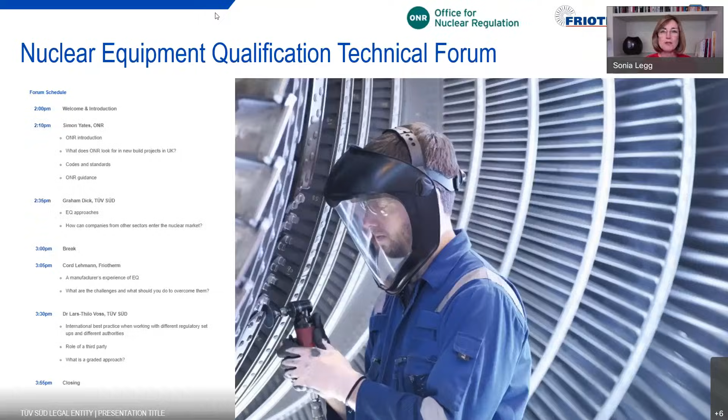So without further ado, let's move on to our first guest. He is Simon Yates from the Office for Nuclear Regulation. He is a principal inspector at the ONR and is an expert in nuclear safety. In fact, he's been working in nuclear safety for more than 30 years. So Simon, thank you for being here today.

I have a question for you. If I was a manufacturer, like many of our guests here today, what do I need to know if I want to supply the nuclear sector? Yes, the nuclear industry is quite rightly heavily regulated to protect the public in the unlikely event of a nuclear accident. Some of the qualification requirements may seem daunting at first, but when you listen to the presentations this afternoon, remember that you won't be alone, as there's a lot of support and guidance available.

I'm going to start off with a brief introduction to ONR for those of you who may not be familiar with the UK nuclear regulator, and then I'll go on to talk about the regulator's perspective on equipment qualification.

ONR is an independent statutory body which was established in 2014 on the commencement of the Energy Act. Formerly, we were an agency of the Health and Safety Executive, known as the Nuclear Installations Inspectorate. ONR is as far removed from the government as possible, and the government plays no role in regulatory decision making.

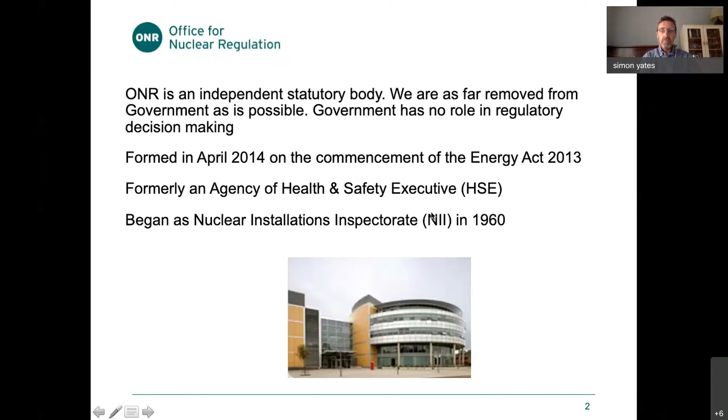There are two parliamentary acts that enable ONR to perform its duties in regulating the nuclear industry. First is the Health and Safety at Work Act 1974, which covers conventional health and safety, nuclear safety, and introduces the important concept of so far as is reasonably practicable when talking about controlling risks. The Energy Act created ONR and defines its purposes in terms of nuclear safety, nuclear security, conventional health and safety on nuclear sites, nuclear safeguards, and the transport of radioactive material. ONR inspectors are warranted under both of these acts, which provide a wide range of enforcement powers.

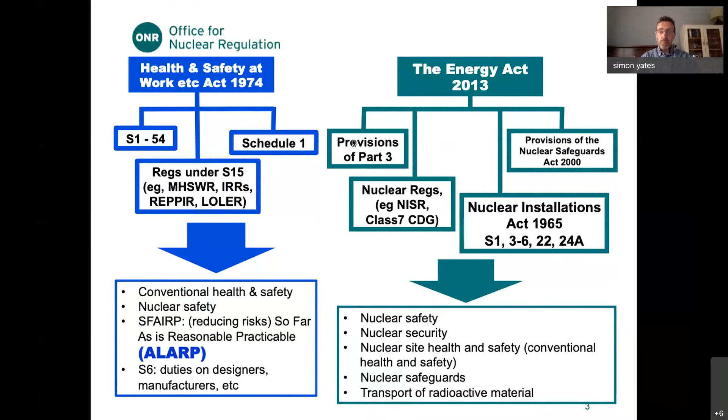The UK operates a goal-setting regime rather than the more prescriptive standards-based approach which is used in some other countries. ONR sets out the broad regulatory requirements, and then the licensees must determine how best to achieve these requirements. This allows duty holders to achieve the required high levels of nuclear safety by adopting the practices that are most suited to their particular circumstances.

This approach also encourages continuous improvement and the adoption of relevant good practices. ONR inspectors generally don't use their regulatory powers in the first instance. Rather, we like to work with the licensees in terms of persuading and influencing and developing open and effective dialogues. Again, just to reinforce that the so far as reasonably practical, or ALARP, approach is central to UK health and safety law.

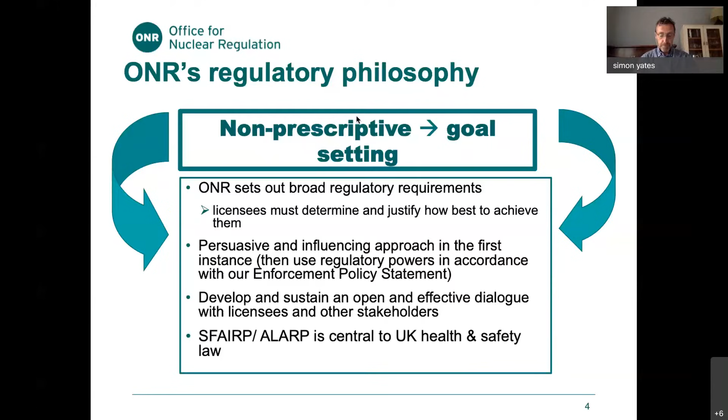So what is equipment qualification? The IAEA documentation includes the following requirement, which defines qualification as the verification of items important to safety, that they're capable of performing their intended functions when necessary in the prevailing environmental conditions throughout their design lives. This definition is reflected in ONR's assessment principles.

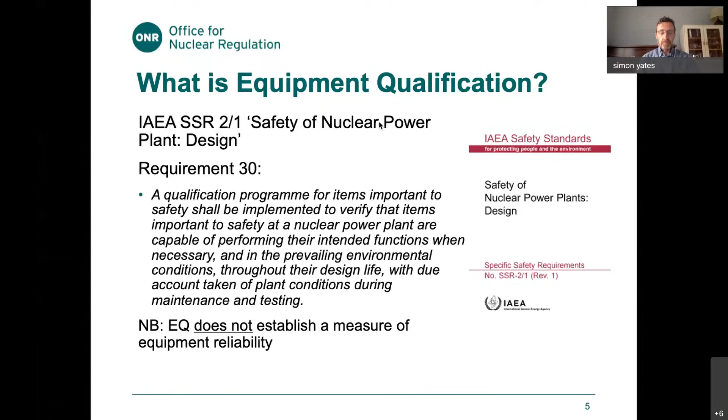The qualification requirements that the supply chain needs to deliver are derived in the facility safety cases by the licensee or the duty holder.

The inputs for equipment qualification are defined in terms of the safety functions for the individual items of equipment, which are generally defined in terms of the required behaviour and the duration or mission time for that piece of equipment. And then the service conditions under which specific equipment is required to perform those safety functions. These are generally established in terms of normal operation and accidents, otherwise referred to as postulated initiating events.

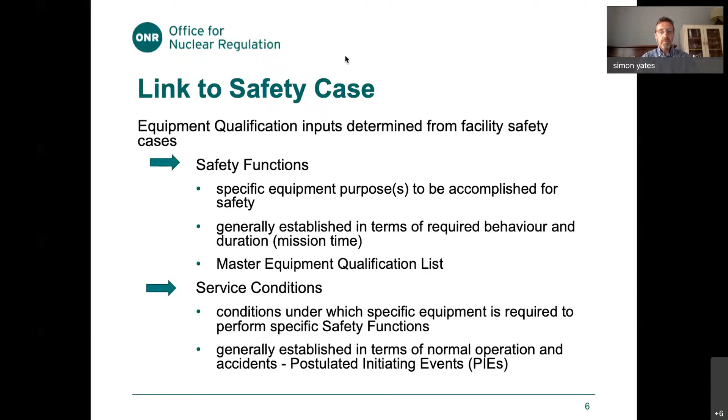Looking a bit more closely at safety functions, they can be broken down into three main types: integrity, stability, and operability. Integrity and stability are generally demonstrated by complying with the applicable codes and standards when designing, constructing, and inspecting. This would be the approach adopted for piping, vessels, and other structures.

In terms of operability, which is applicable to electrical equipment, I&C, and mechanical equipment, this is generally demonstrated by performing qualification testing.

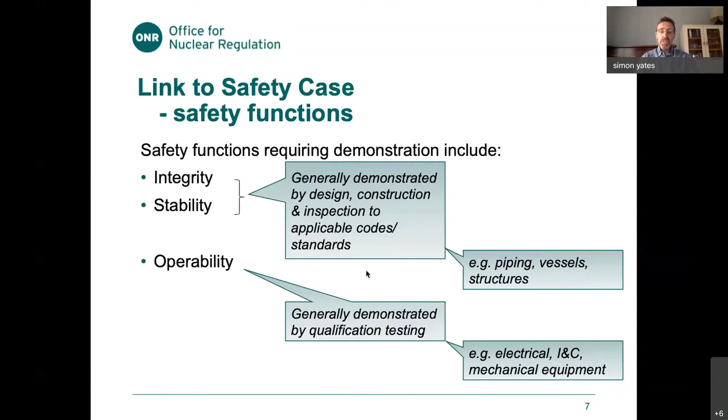In terms of service conditions, we have a range of postulated conditions that are categorised as normal operation, abnormal conditions or mild conditions, and accident conditions, otherwise referred to as harsh conditions. The first two are generally considered as part of the normal design assurance process, but special attention needs to be paid to the accident conditions or harsh conditions, which typically arise during loss of coolant accidents, high energy line breaks.

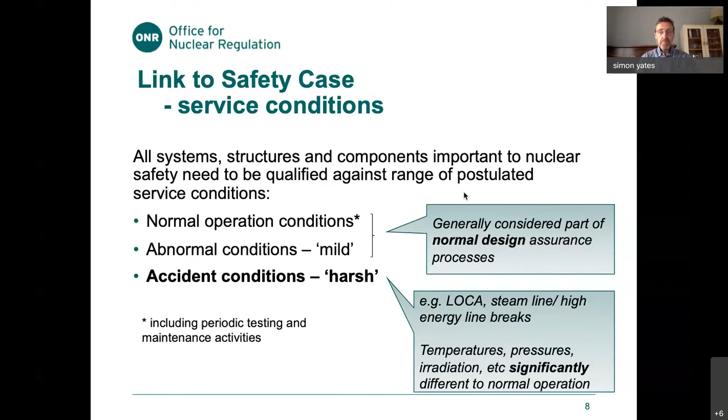During such events, temperatures, pressures, and irradiation tend to be significantly different from those which occur during normal operation. So for harsh service conditions, little confidence can be derived from normal factory tests, commissioning, normal operation, and in-service testing, hence the need for specific qualification testing during the procurement and manufacturing activities.

Harsh conditions tend to focus on those events with the potential to produce multiple simultaneous common cause failures. As mentioned, this typically includes LOCAs and steam line breaks. Seismic vibration is typically included within equipment qualification programs, as this hazard can also lead to common cause failure across a facility. Other hazards, for example flooding, are generally addressed by physical protection and separation.

Qualification for harsh service conditions is also commonly referred to as equipment qualification for accident conditions.

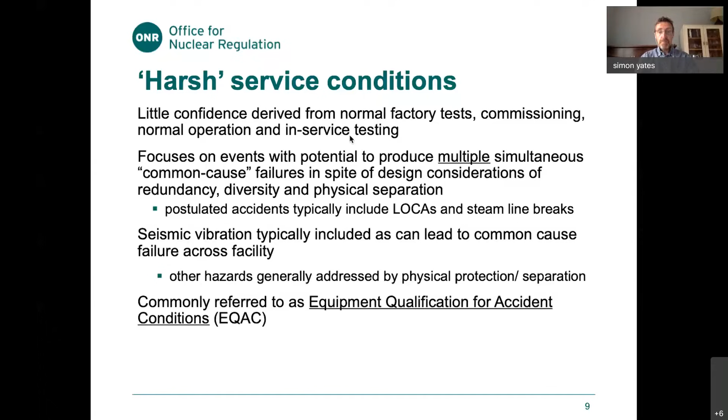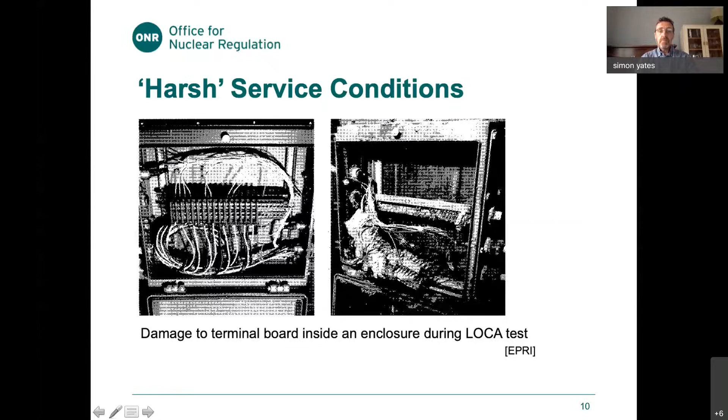An important aspect of equipment qualification is the ageing, in order to adequately reflect the degradation that can occur during normal operation prior to accident conditions. So any qualification must address the ageing occurring from elevated temperatures and radiation levels, and this is of particular relevance to non-metallic components.

The ageing evaluation also feeds into defining the qualified or installed life of particular equipment, after which the equipment may need to be replaced or refurbished if it has not been demonstrated to withstand the ageing for the full operational period of the particular facility.

Through life environmental monitoring also allows the opportunity to confirm the bounding nature of the qualification, and also in some circumstances to extend the qualified life of particular equipment.

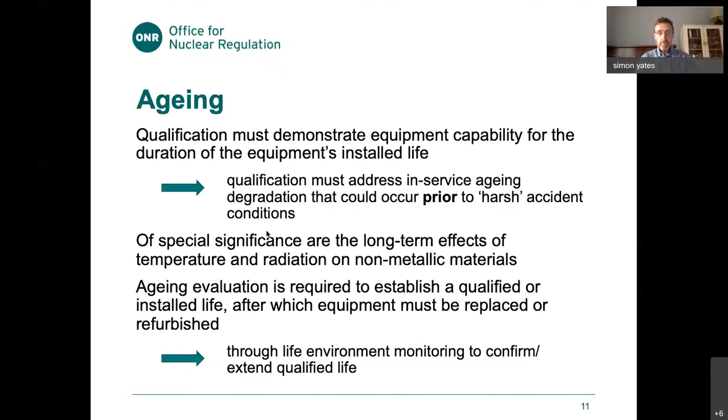Mechanical equipment is generally less sensitive to ageing mechanisms and the harsh environmental service conditions or the ambient service conditions, with the exception of non-metallic components, for example plastic, rubber components, lubricants, paints and coatings, and also seismic events. For mechanical equipment, it is often the operational service conditions during accidents that can be more challenging.

By operational service conditions, I mean the system conditions, for example, valves needing to operate under two-phase flow and pumps needing to handle debris following accidents.

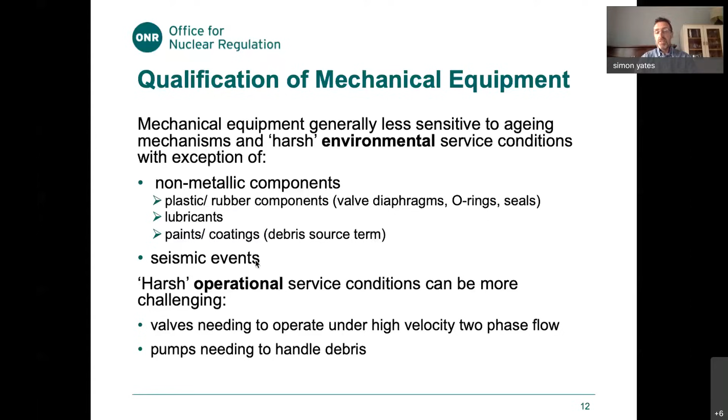This is just a photo of a valve solenoid diaphragm which has been damaged during a LOCA test.

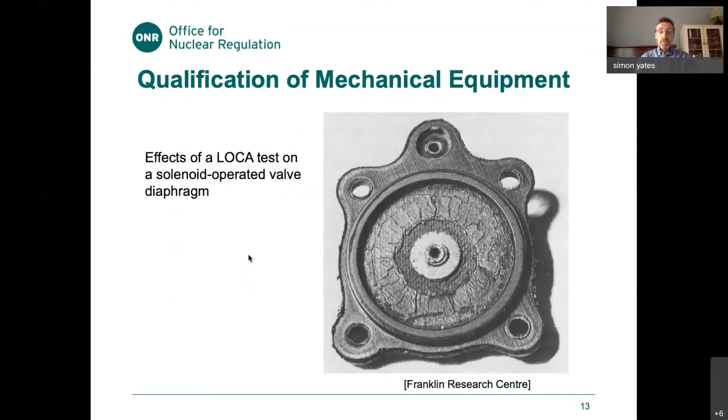The IAEA defined 3 key phases of an equipment qualification programme: the design inputs, establishing EQ, and then preserving EQ. The supply chain has an important part to play in the establishing qualification phase, as this is when any qualification testing is undertaken and the qualification documentation prepared to support the licensee safety case, and then for the ongoing preservation activities.

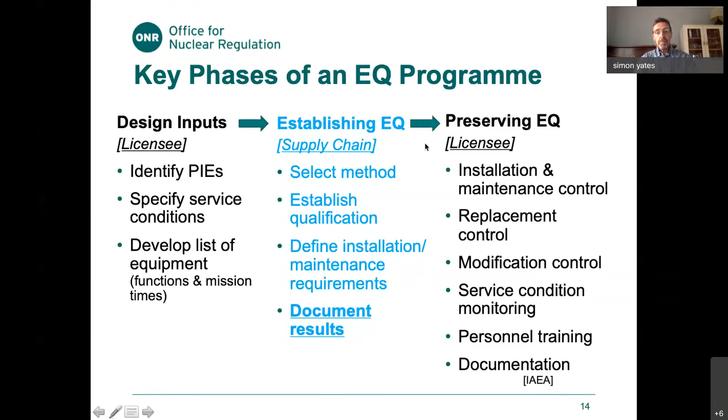It is up to the licensee to demonstrate that their approach is adequate and able to satisfy the requirements of their safety case, whilst meeting the so far as reasonably practicable principle.

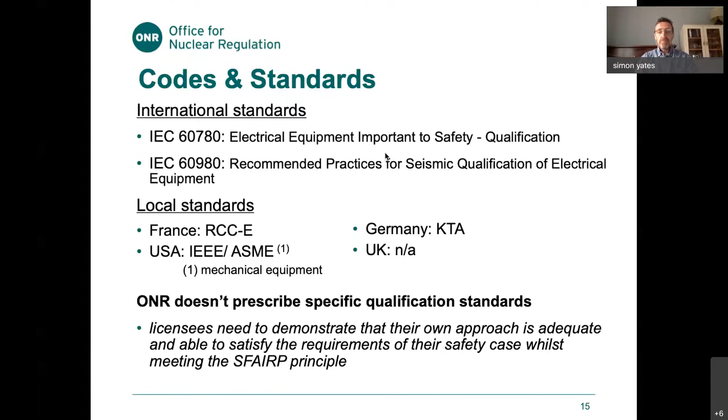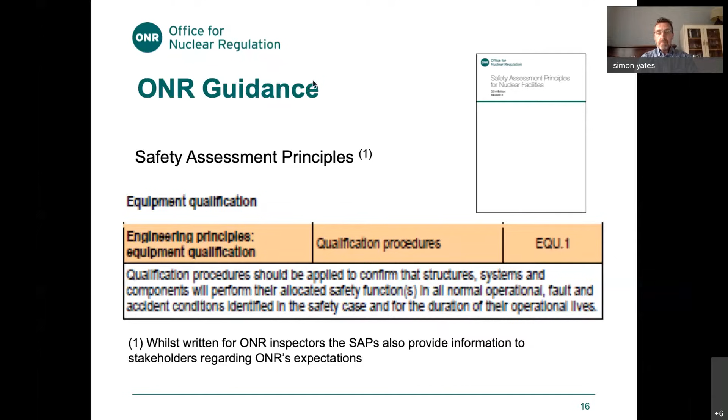In terms of ONR guidance, the ONR safety assessment principles, which are written for ONR inspectors but are also available to stakeholders, include a principle for equipment qualification, EQU.1, which effectively reflects what's in the IAEA guidance document I presented earlier. Currently, this guidance is very limited and only covers concepts at a high level, and doesn't particularly draw out the significance of qualification for harsh service conditions.

There's no single source of guidance on developing and implementing an equipment qualification programme. So it's been recognised that there is a need for an ONR technical assessment guide on equipment qualification, focusing on harsh environmental conditions. This is largely driven by the needs of the civil new build programme, but will also apply to existing nuclear facilities with a proportionate application. A draft of the technical assessment guide is currently being produced and will be shared with the Nuclear Industry Safety Directors Forum in due course.

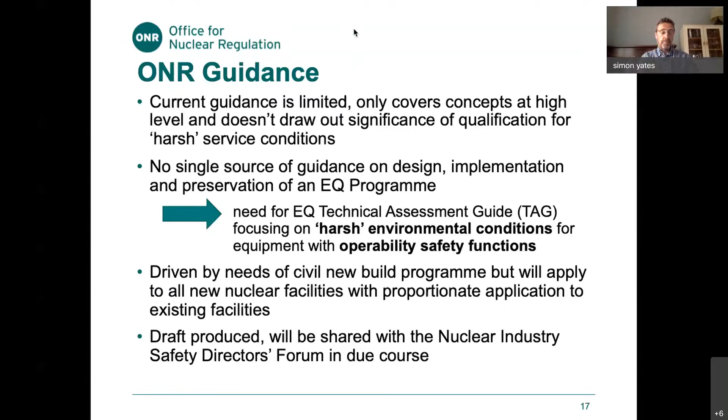So to summarise, three key things to remember: equipment qualification inputs are determined from the facility safety case; equipment qualification provides confidence that equipment can perform its intended safety function during normal operations and accident conditions; and finally, equipment qualification must be preserved throughout the lifetime of the facility and contributes to reducing risks so far as reasonably practicable. Thank you.

Thank you, Simon, for a very comprehensive overview there. I think that gives you a real insight into how important EQ is. And in fact, Simon, we've got a couple of questions for you. I know people are just warming up on the questions front, but do get them coming in. We do value them. But I've got a couple here for you, if that's all right, Simon. Just wondering if the UK has tougher regulatory requirements than other countries. Obviously you represent them, but where do they sit in that?

As I mentioned in the presentation, the ONR doesn't actually specify a particular approach, and in general the principles and methodologies adopted in the various standards are very similar. UK licensees are likely to adopt the standards from the equipment vendor's country. Where the UK approach to regulation may alter the requirements for equipment qualification is through the extent of the equipment to be qualified, the detailed safety functions to be qualified, and the service conditions in terms of pressures, temperatures and radiation, which may all be different from other countries due to the requirements the ONR places on the licensee in terms of their safety case.

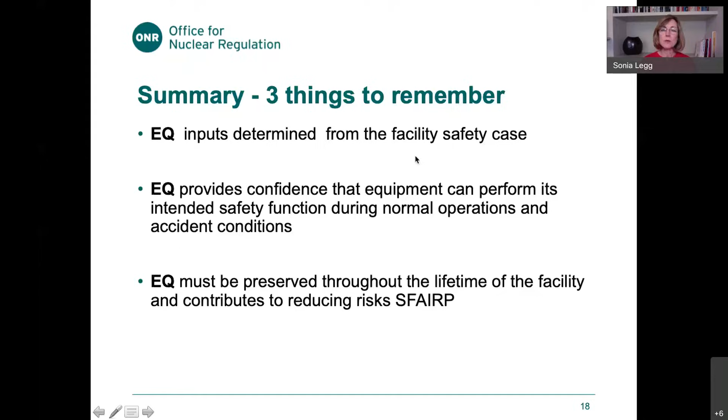And hopefully I can talk you through some examples.

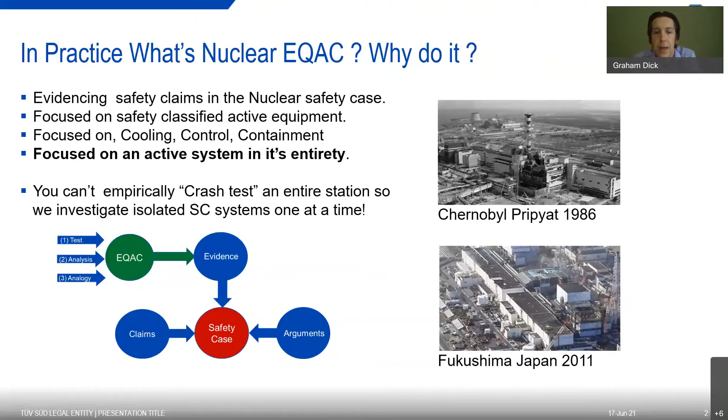We've got a quick graphic on the screen that illustrates how the evidence generated by the EQAC activity feeds into the safety case, so it satisfies the claims made in the safety case.

I'll briefly speak about the three main philosophies used in qualification within EQ. As a supplier who needs to qualify your equipment, what would you need to consider? Which approaches would suit you, and which would you choose?

The one that everybody thinks of first is test. We use a test-based approach where you really can't use analysis, either because the environment can't readily be simulated or because the technology is just not readily understood, or it's just too hard to model.

We often find that suppliers may already have FAT data, and they often ask specific questions as to whether they need to go ahead with a dedicated EQ test. But as we briefly mentioned, FAT data doesn't often adequately simulate nuclear accident conditions, so as such it won't satisfy the claims required in the qualification file.

We have a few pictures on the screen illustrating what we can do. In short, TUV are the largest laboratory group in Europe, and we have most of the capability we need under our roof. I won't go into exact details of what we have, but most qualifications can be completed without specimens leaving our group, and often without them leaving a specific laboratory.

To give an international perspective, our key facilities are in Munich, Fareham, and Scotland - there are pictures on the screen of the Fareham facility. The key point here is that the NEL laboratory in Scotland is the national laboratory for UK flow measurement standards, with other national standards being held at NPL at Teddington.

So we're well placed to qualify against design basis failures, and of course, seismic.

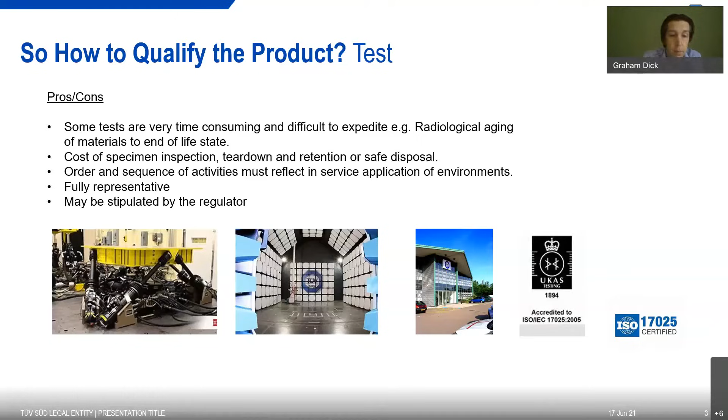That really brings me on to the second most commonly used approach. We've talked about test - the second most commonly used approach is often analysis, and analysis is often regarded as the most flexible approach.

We're pretty much at the cutting edge of product analysis and modelling, not only in nuclear but also in other sectors, with an accomplished in-house team of analysts and programmers.

Crucially, I think these capabilities can be used across a range of different areas, and we use them within the group for the investigation of aerospace, medical, automotive and energy sector challenges. The interesting thing is that it's amazing what can actually be modelled now, what can actually be simulated using a range of software packages.

The fact that once generated, a model can be updated and adjusted, with boundary conditions moved, means it's a good way to protect your qualification programme and its timescales against potentially fluid customer requirements. So if you've changed your requirements, analysis is a good way to qualify, because you can adjust your computer model much quicker than you can adjust a physical specimen.

As a final point, for any analytical qualification, software quality guidelines must be followed, and the programming code generated must be made available for inspection by regulatory authorities if requested. This is one of the problems customers have had in the past, where they've developed products using black box analytical techniques. We've suddenly found we've had to go back to square one because we can't interrogate the original analysis.

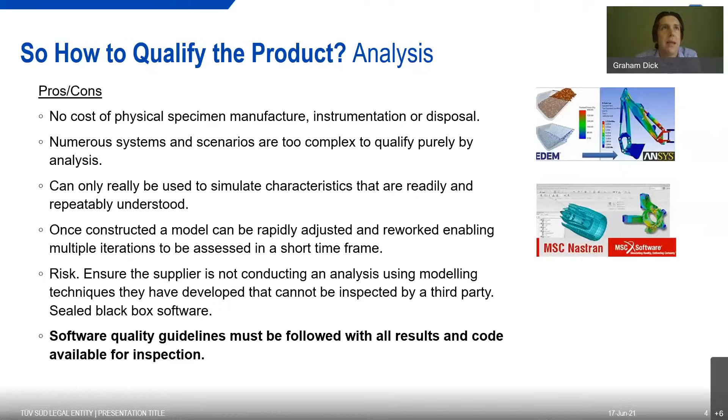So, having talked about test and analysis, we go on to the third approach, which is most commonly used: analogy. Due to the challenge of finding suitable images of appropriate nuclear equipment, I've illustrated the analogies using cars, bicycles, and other consumer products. But the logic is the same.

If a previous version of your product was qualified, or if products in your range were qualified, you may not have to go back to square one to requalify - and I think that's a key message. We're very experienced in this aspect of qualification, because in Germany we are a regulatory body, so we regularly construct complex multi-legged arguments to address justifications similar to these.

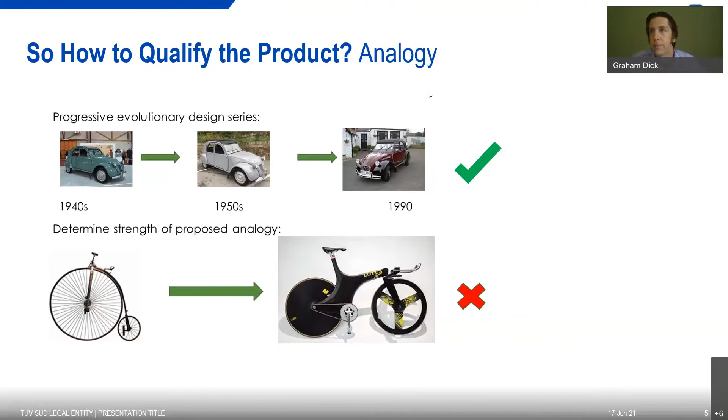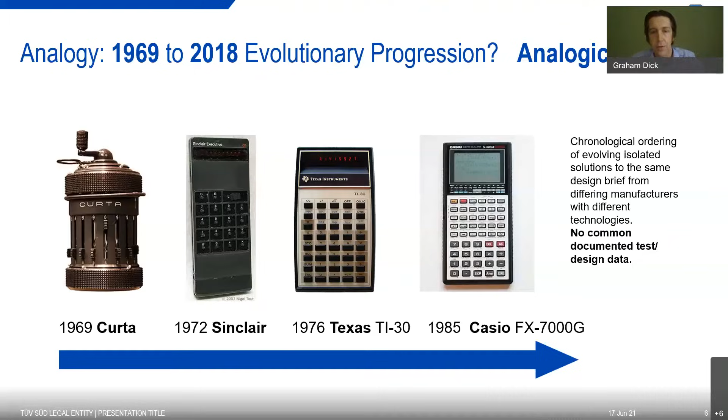However, some manufacturers do have ranges of products where this can be applied. The illustration shows cars, but it could just as easily be valves, pumps, motors, or sensors. If you have qualified in the recent past, you may be able to do so again with limited complexity. But of course, you can only draw an analogy from an existing qualification - you can't do an analogy of an existing analogy.

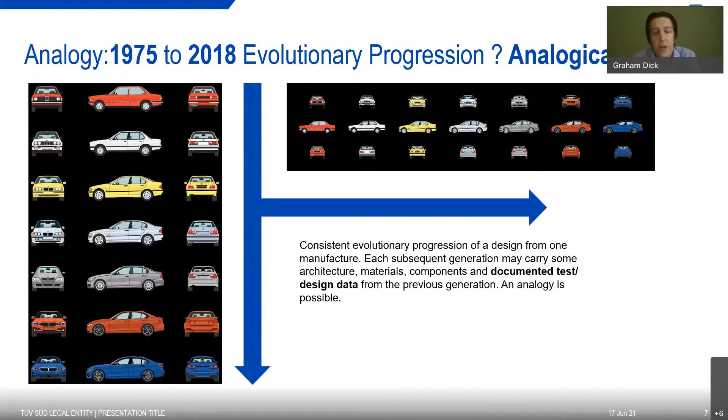So, in general terms, that covers qualification and the three main approaches that we follow. Why is it so important, and why is it so important now?

Globally it's important, as it's a cornerstone of any nuclear plant safety, but in purely commercial terms it's important for suppliers, it's important for industry, as it opens the door to an expanding market.

With around 443 stations across 30 countries, nuclear generates a lot of power at the moment. And the consensus across major international studies is that low carbon sources like nuclear need to be deployed at a large scale in order to meet net zero carbon. A median projection is that output by 2050 could possibly need to double in order to limit climate change to 1.5 degrees.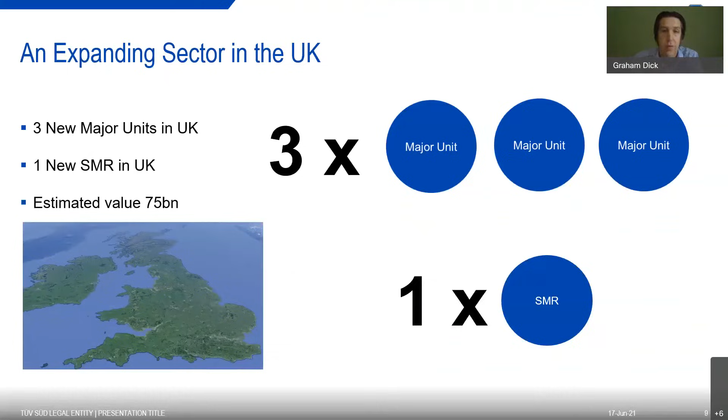So within the UK alone, the sector's set to increase significantly. Currently, there are 3 new major units that are planned, with 1 SMR. And the generation of carbon neutral baseload, of course, is key to the expansion of other green technologies such as electric vehicles and the hydrogen economy. So at present, the estimated market value for the sector is about 75 billion, potentially with overlapping projects.

So we know the sector is set to expand, and we know it's set to expand in the UK, and we know that multiple different designs of station may be used.

Having identified the sector is expanding, it's interesting to think about how equipment within an average plant is divided and grouped from an EQ perspective. So the graph on the screen presents a sweeping generalization, and it's not focused on a particular plant design, but it's an effective high-level illustration of general safety class distribution aligned with environmental requirements.

In short, an awful lot of the equipment in the plant is non-classified or non-qualified. But of that, seismic is almost a universal requirement, which straddles most of the different categories.

Crucially, we have quite a lot of experience of doing this, having had EQ files certifying seismic performance by analysis accepted on UK new builds within the last 2 years. So seismic requirements are not necessarily that expensive or time consuming to address.

Most challenging nuclear accident conditions would really only apply to class 1 to class 2 equipment, and those would primarily be equipment that would be located within containment, which would have very high temperatures, pressures, ionising radiation, heated steam, and so on. So it's a relatively small number of component parts.

But the key message is that for most of the equipment, qualification is probably less demanding in functional terms than you may think, specifically for some of class 3, or what we possibly refer to as K3AD if we were using the RCCE code. So if your products are produced according to ISO standards of quality and traceability, you would be well on the way to meeting some of the requirements of some of the less challenging classes.

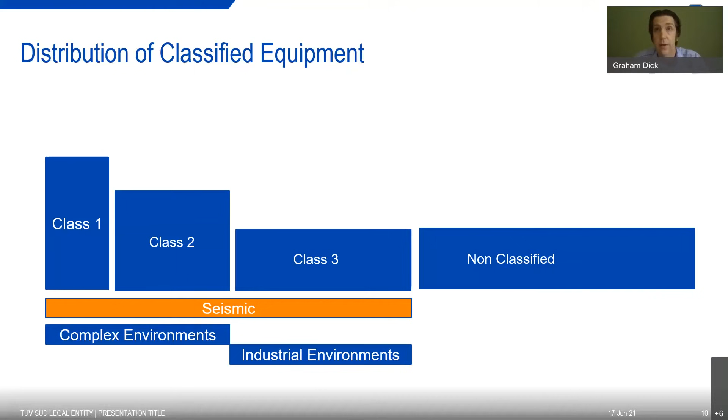So we know the sector is expanding, and we know we need more breadth and more depth of supply chain, and we know that we need new solutions to certain problems.

History tells us solutions to one sector's requirements may already exist in another sector. The example on screen is a technology migrating from a highly regulated aerospace sector to provide a state-of-the-art solution to an automotive problem in this instance.

A more recent example would be the adoption of multiplexed wiring systems by maritime and offshore operators using networks of CAN bus and Modbus sensors, as per automotive practice. In fact, sometimes coupled to acoustic flow sensors that have their origins in medical application.

History tells us when technology changes sectors, it's often to the benefit of both sectors concerned. With increased commonality comes larger markets to offset development costs.

This is one of the interesting things we see from a TUV perspective, is that we don't just provide laboratory services, and we don't just work in the nuclear sector. So our key observation as a group with involvement in all the sectors shown on the slide is...

One of the things that seems to stop technology moving sectors is qualification, and it's the perceived complexities of nuclear qualification. So if we can improve this situation, it would mutually benefit the nuclear sector, who will have a greater choice of suppliers, and the license holders, who will be able to deliver quicker using pre-qualified component parts.

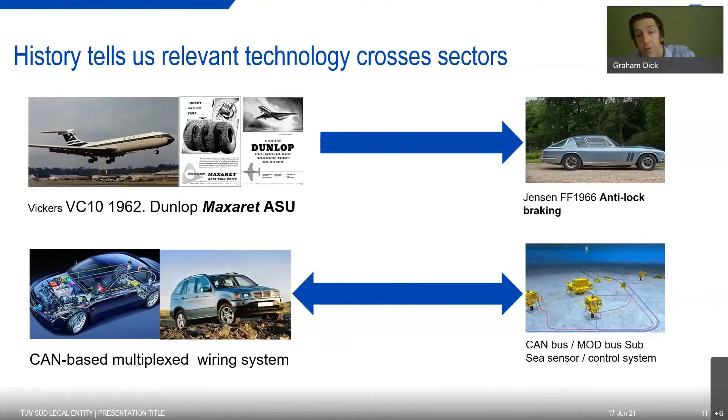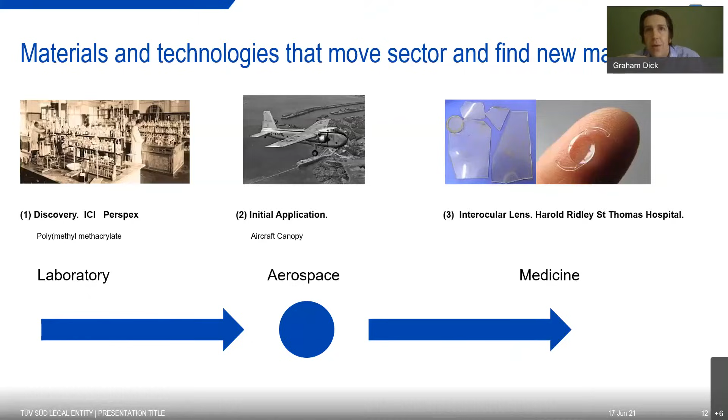Our experience, having helped customers qualify their products, is that qualification helps you understand your product, potentially discovering new capabilities. There are historical precedents to this. Technology can follow an indirect path, and a final application may not be thought of or even initially conceived at the point of development. As shown on screen, the ultimate application of the new material was not conceived at the point of invention, and an indirect progression was followed. So a step forward in innovation in one field may be required basically from new technology in another field. We need to keep our mind open to that when we're looking at qualification.

In our opinion, considering nuclear qualification from the outset opens numerous avenues. Why not qualify to very challenging nuclear requirements from the beginning, knowing that they bound all other subsequent applications? As much as anything, this might actually be the most economical approach.

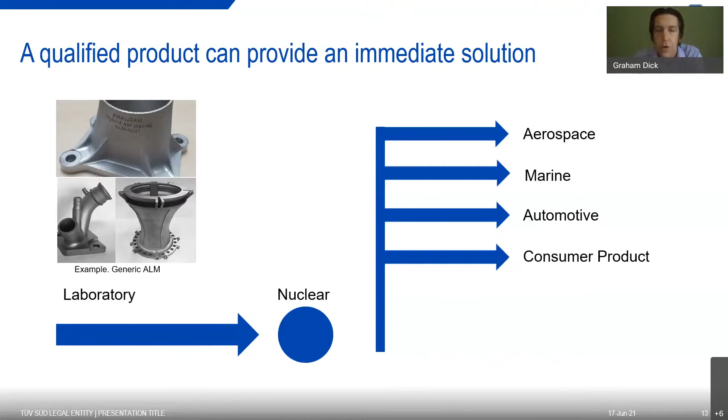As I draw this to a close, shown above are some of the sectors we support that, in our opinion, have comparable focus on reliability and integrity, and from direct experience contain translatory equipment suitable possibly for nuclear applications. The focus on safety and reliability is not only with the nuclear sector, but with other sectors, and crucially numerous other sectors have similar requirements, such as green energy, offshore energy, aerospace, automotive, oil and gas, and we have involvement in most of those areas.

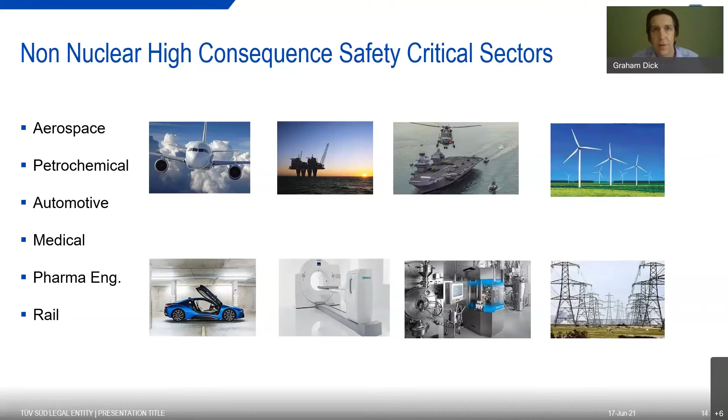In recent experience, we believe there's cross-sector applications that may exist for many technology types if people are prepared to qualify. General examples could include ruggedized cables, resistant to very great extremes of temperature and pressure, telecom systems and control room architecture derived from defense or maritime applications, specialized centrifugal and reciprocating pumps used in a lot of stations now, and motorized actuated valves, a lot of which have origins in the oil and gas industry. And finally, as we'll hear about shortly, classified HVAC systems, with a lot of modern stations involving environmental containment.

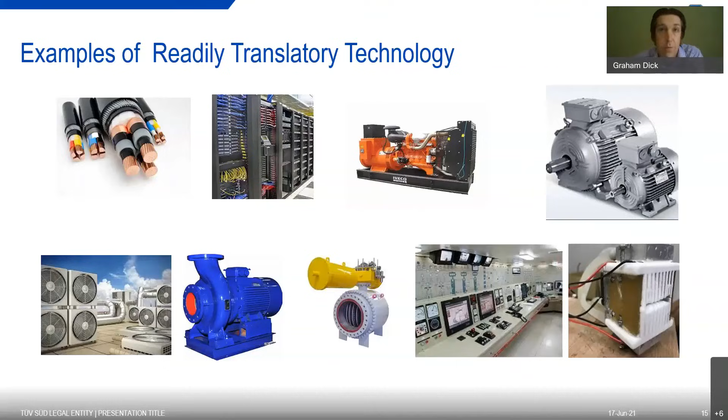Classified, ruggedized HVAC system is absolutely crucial. An interesting extension of this may be the use of thermoelectric cooling devices, such as one that's illustrated. So it gives you a feel for the cross-section of technology that's out there, and that if it was qualified, could potentially find uses very quickly.

So finally, some final thoughts. From our unique position with involvement in multiple sectors, we're well placed to guide anybody through nuclear qualification. We really feel the sector needs greater breadth and depth of suppliers. We'd strongly encourage you to consider qualification of your products for nuclear applications, and certainly investigate ISO 19443, the fit for nuclear requirement, which will give you a good grounding in the requirements you need to comply with. I hope I've dispelled some of the misconceptions surrounding EQ, and I hope I've inspired you to inspect the sector in more detail and possibly enter into a conversation with us about qualifying your products, and we'd be very happy to help you with that. Hopefully, supplying the nuclear sector is something that requires closer scrutiny for a lot of people.

Quite a few questions for you. The first one I'm going to ask is: do you need to qualify the system as a whole, or are we just talking components?

The system as a whole, yeah. I think Simon briefly talked about this during his presentation as well. What we're talking about here are functional systems that have a role typically in cooling, control or containment, systems that when activated actively bring about a safe state. So although we look at the performance of an isolated component part, we're really interested in the functionality of the entire system. That can be quite challenging when you've got a system that in its entirety needs to be subjected to a seismic shock, for instance, and it could be a very large installed piece of equipment. You've got to think about how you can analyze that, how you can model it, or potentially how you produce a very large test specimen, which might have to fit onto a very large seismic table, or go into a big climatic chamber. So the answer is yes, you'd have to evidence the performance of the system as a whole, or you may be able to investigate isolated aspects of that and build a more cohesive model.

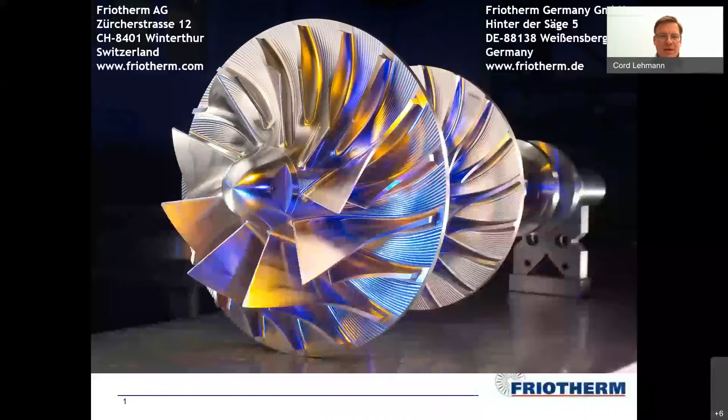So it should come up. There we go. First of all, Friotherm, what are we doing? We are a Swiss-based company. The headquarters is based in Switzerland, and there is an engineering and manufacturing facility in Germany, with service offices in Scandinavia, France, and Brazil. One main branch and one main product are industrial heat pumps with a capacity up to 20 megawatts and up to 100 degrees C heating temperature of the water.

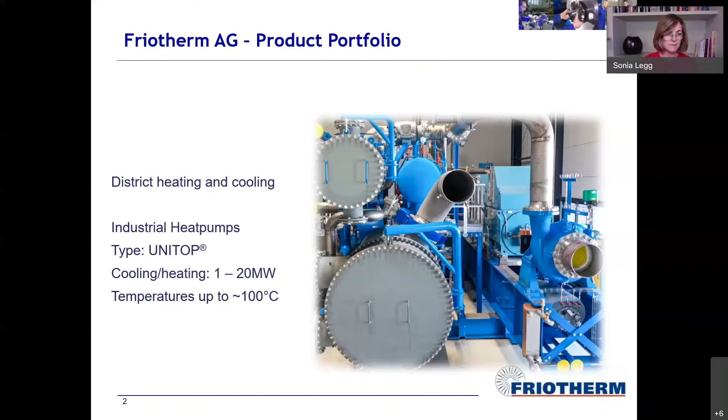And of course what we're talking about here is standard and safety-related chillers for various systems in nuclear applications. So when we talk about equipment qualification, what is the main goal? What are we looking at? What we have to provide is evidence that the equipment fulfills the specified requirements under normal and upset conditions at the end of its lifetime.

So we have to show structural integrity. We have to show operability during and after an event. What this event can be, I will talk about in a second.

And what Simon already mentioned is we have to do some pre-aging. We have to preload the equipment. We have to stress the equipment with mechanical, thermal, and operational loads already, bring it to the end of its lifetime condition, and then do the testing for equipment qualification. We have to choose the test conditions conservatively so that they envelop the event, and therefore we really have to test at harsh conditions.

And those events can be, for example, extreme environmental conditions like high and low ambient or room temperatures, high and low humidity, abnormal electrical conditions like high and low voltages and frequencies, and of course seismic events, which is the last test you would do normally. Airplane crashes, for example, can also pose a certain event.

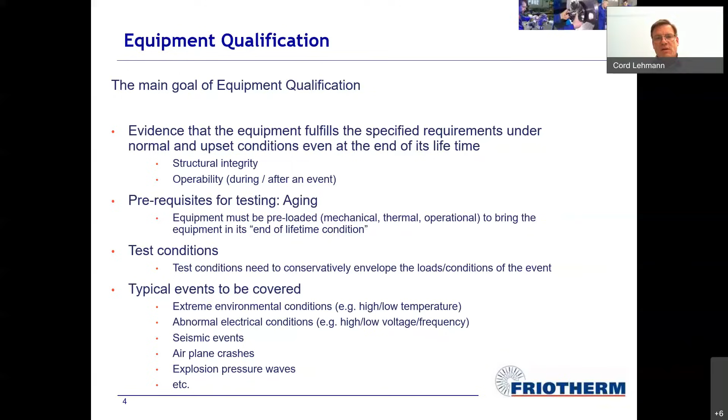And of course maybe also explosion pressure waves that can happen, and other events you need to look at during equipment qualification. So how do we qualify? Basically, you either choose to build a prototype, which is a fully identical replica of the production unit you want to put into a nuclear plant, or if that prototype gets too big in terms of size and weight, you may look into mock-up models, which are simplified installations consisting of just a few components that you really need to qualify. But in any case, the prototype and the mock-up model must be fully identical to what you will deliver to the site.

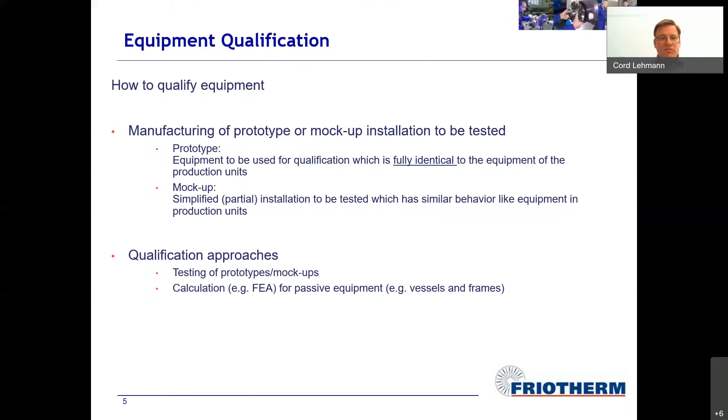Then you go into testing with the prototype or the mock-up. Equipment qualification also means that prototype will operate during testing, or you agree on not operating the equipment. In any case, you have to choose the harshest condition—if non-operation is harsher than operation, you go with non-operation, or operation if that's the harshest condition. For passive equipment like vessels and frames, you would go for a finite element analysis and do a calculation rather than build those as prototypes, saving money and time there, but I'll say more on this in a second. So when we look into equipment qualification, we can see this has developed over the past years.

We have a pre- and post-Fukushima era. In the pre-Fukushima era, the nuclear operator had to prove that the probability of an event is sufficiently low to happen, and as a consequence, equipment qualification approaches were not as detailed as today. In the post-Fukushima understanding, we have to look at each event and consider it even if it is very unlikely. We now have to prove that the event can be handled within the regulatory restrictions and ensure the plant is always safe.

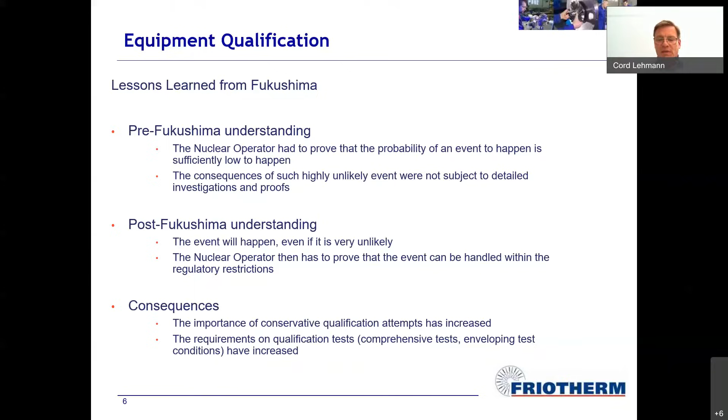So we look into each single event and have to make sure our equipment is safe. As a consequence, we have a conservative approach for qualification. We have to look into enveloping tests with the harshest conditions, comprehensive tests, lots of tests, and of course documentation. This has increased, and from here we get into the challenges we look at.

Equipment qualification has significantly evolved during the past years. We have numerous specifications in the market, in the world. We've seen ASME, IEEE, KTA for Germany, and RCC-M and E, all specifications that provide information and characteristics for your qualification approach. You have to look into those.

There are different approaches for different types of equipment, and when you go to a different country, you do not have unique codes and standards for equipment qualification. It's dependent on the regulatory requirements from the nuclear body in that country, or from the operator, and of course on the local conditions. You may also face conflicting specifications and requirements, and you have to solve those.

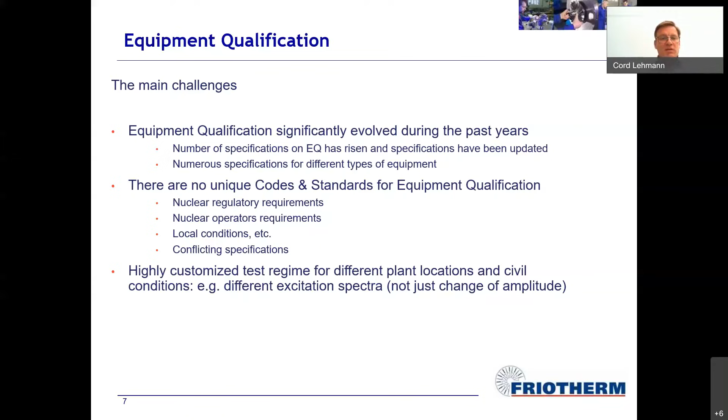In the end, you end up with highly customized test regimes per site, per plant, maybe even within one country. Each site can be different, for example especially for seismic spectra. You have different buildings, different excitation spectra, and this may require a new or partially new qualification.

Some more challenges: surveillance by the nuclear operator and regulatory authorities has increased due to demand for more assessments, justifications, and documentation in the pre-qualification phase. So you have to develop your qualification strategy properly and derive procedures and step-by-step agendas, with the nuclear operator and regulatory authorities involved. We need experts to do all this—it's a multidisciplinary approach involving mechanical, electrical, software engineers, and those are hard to find.

For passive equipment, even though you are just calculating them with finite element method, you still have to prove your approach is correct and covers that event, whatever it is, and discuss your results with the authorities and the operator to get approval for your approach. So it's not an easy task, as you can see. It sounds easy to calculate, but it can be tricky as well.

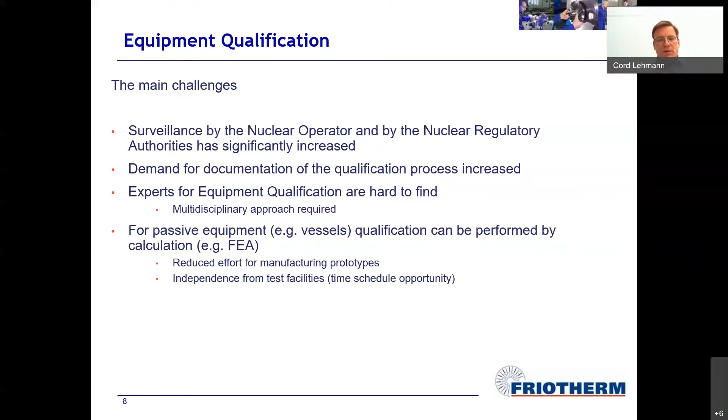So how do we work through this? All these are challenges, and you can work with them. You can overcome the challenges by, for example, establishing a dedicated qualification team. If you think this can be done with just a few hours per day, it will not work—you have to involve internal specialists and external specialists as well.

You have to read the requirements, look at the site conditions, what is requested, your safety classification, and so on, and perform the qualification strategy, discussing this with the customer, the operator, and the authorities to set the basis for your equipment qualification. It's a collaborative approach, and you need to find pragmatic solutions. Simon already mentioned something like ALARP—as low as reasonably practical. So you have to find solutions and set up the basis for your qualification approach.

Involve the authorities, as I said already, and don't misunderstand the factory acceptance test and mix it up with equipment qualification. Factory acceptance test is something you do at the end of the line manufacturing process, showing that your product delivers the figures you are requested to provide. Equipment qualification really shows that the equipment is good for the specified lifetime.

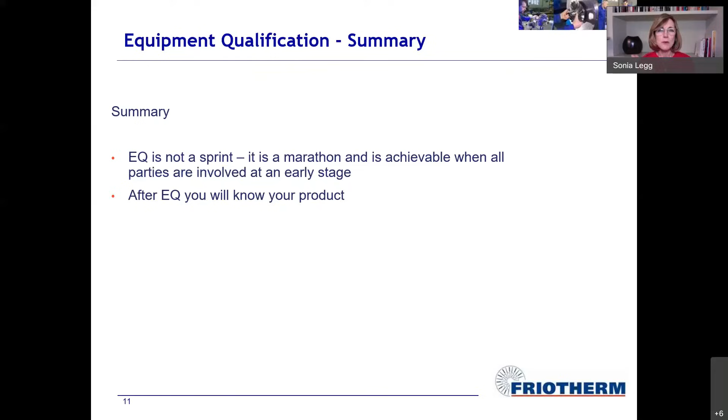That's real insight from someone already operating in the nuclear sector successfully across jurisdictions, from Europe and in the UK. Now we can hear all about how you can operate in more than one country with more than one regulator. Dr. Thilo Voss can help us here. He's the business line manager for nuclear power and decommissioning at TÜV SÜD, and he's led many projects related to nuclear safety at home in Germany, where he's based, and abroad. A wealth of experience, and he can share some of that with us now.

So Thilo, how difficult is it to supply a number of different countries when they all have different regulators?

Thilo, we couldn't hear you for a second there, so perhaps you can start again for us. I'm unmuted now - oh, sorry. Many thanks, that's the problem in Corona times.

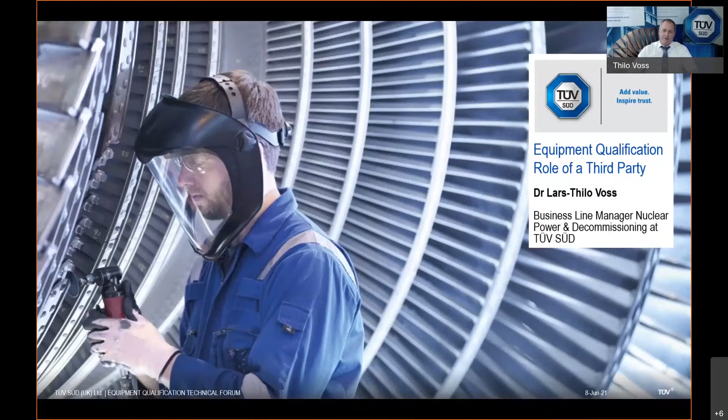There are certainly lots of different regulatory systems out there, and you might already have experience with them, or at least know that. We've heard already that they have different viewpoints on how things are regulated, and we had questions about the involvement of third parties. These systems are one reason why equipment qualification looks, in the first instance, rather confusing - there is unfortunately not a regulation accepted by everybody, no one program that fits all. Nevertheless, having been involved in many of these projects and programs already, I will try to give you an idea why these programs sometimes look so difficult, and how you can navigate through them without much pain or harm. I hope you can see the slides and that worked. I guess for that you need a little deeper understanding of what the real challenges are currently in moving from one regulatory system or oversight system to another, and what is behind all that.

One reason definitely is that nowadays nuclear projects have become more and more international and complex. I'll have an example for that later on and tell you what that leads to and what the outcome is. Designers and manufacturers need to deal with regulatory systems across the world, more or less.

Wait a second, sorry, can't move my screen. Just fighting with the technology here. Trying to solve that, but it doesn't work. It's funny. I hope you can at least see me. Okay.

Designers and manufacturers need to deal with different regulatory systems, authorities, design codes, and technologies. That means, especially with the technologies, there are a lot of design philosophies behind that, which is also very important for the EQ topic in the end. The safety concepts really lead to different assumptions and different ways of how to qualify these things and what you need to do technically there.

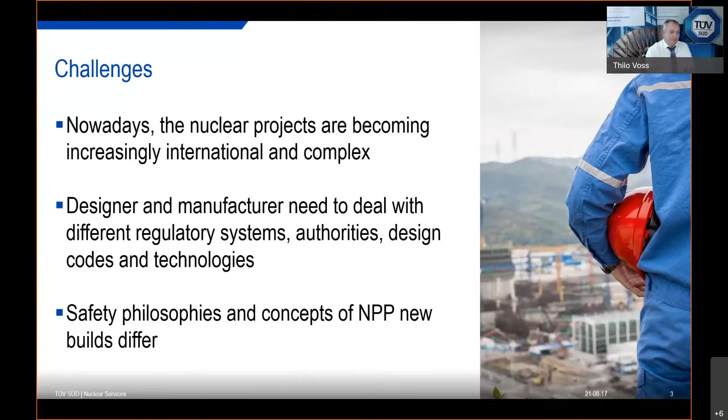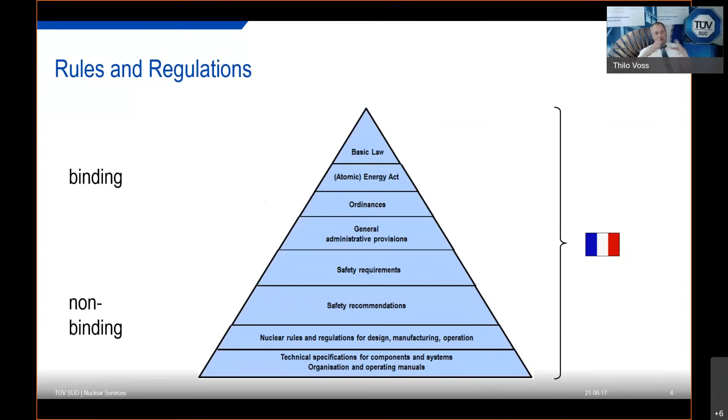Let's turn back the clock to the 1980s - an ice age in any way. At that time there was a lot of new build activity in Europe. Let's take France as an example, because it's nice to look at. We had this regulatory pyramid, and you can clearly see that at that time, more or less all these nuclear new builds were done in a very closed system. We had binding nuclear laws and ordinances coming from the regulatory side and the law side in France. We had safety requirements given by EDF, and the new build was done basically with the supply chain with EDF - so Areva, or Framatome, or Alstom, and the supply chain down there.

Nowadays, look at the new builds we face in Europe currently - we have one in the UK, one in France of course, and one in Finland.

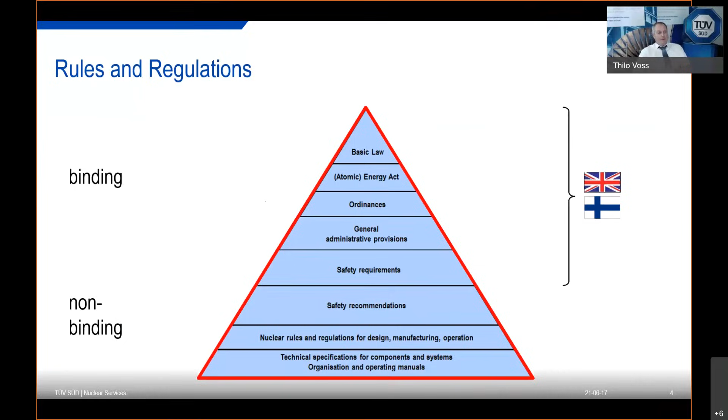But in fact, these nuclear new builds have to deal with components coming out of many, many regions in the world. For example, Germany, Japan, if we look at the Horizon projects, or elsewhere. And these manufacturers or component deliverers are used to working within their own regulatory frameworks, based on their technical knowledge and technical standards.

Moreover, you have nuclear rules and regulations, codes and standards that are involved. Let's say, for example, RCC, or we have dealt already with topics like ASME and other things. And this makes things extremely complicated to align.

Last but not least, we have designers coming from elsewhere in the world. Japanese people doing these things, a lot of people from France, wherever you have the guys designing these nuclear power plants. And that leads to a huge misunderstanding in these topics and a cultural problem.

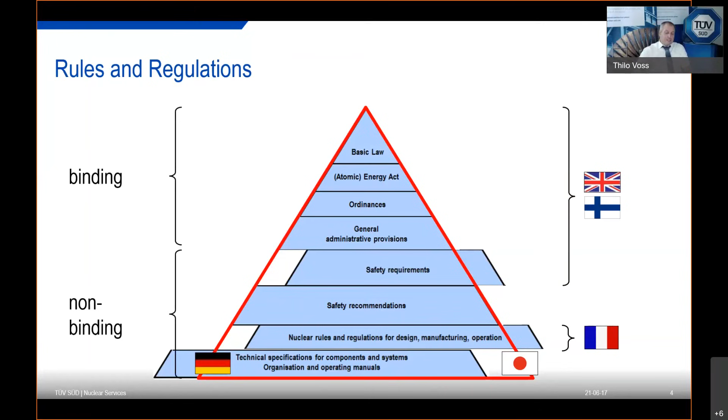I'll touch on that in a few seconds as well, because if you look into Europe already, we have a huge variety of regulatory systems. It was touched on already by Simon, saying ONR has a goal-setting approach, which I personally like very much. But you have also completely different oversight systems.

If you go to France, for example, you will see that the oversight down there is more procedural oriented. So it's very important to follow the processes.

And if you go to other countries like Finland, Switzerland, or even Germany, you will find more prescriptive approaches, where we really have a set of rules and regulations saying what you need to follow and what you need to do. For example, take a look at STUK — you even have an inspectorate integrated for class 1 components that needs to be integrated into all their work as well.

And then last but not least, and that's an important point, moving from one regulatory system to another, you need to deal with a different view on how a third party needs to be involved. I had that question already as well.

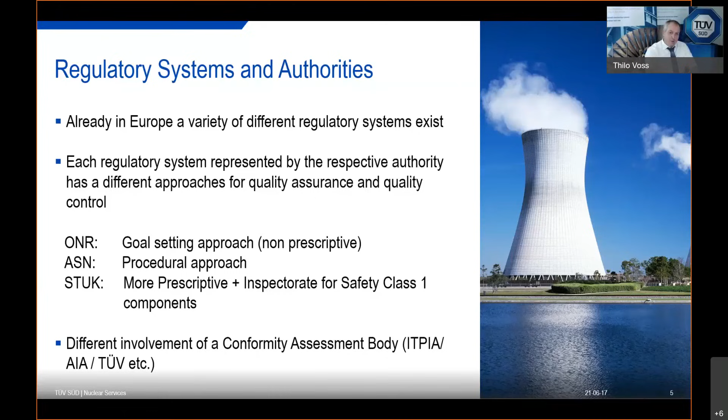We have the ITPIA system, for example, for Hinkley Point. We have AIA systems in Finland — an authorized inspection agency that needs to be appointed by STUK, for example. Or you have even a system like in Germany, where we as TÜVs, as was said already, are more or less the prolonged workbench of our authorities dealing with all technical topics for nuclear power plants. So these are completely different models of third party involvement that you will definitely need.

Then we have completely different safety philosophies — that's what I meant. If you have, for example, a core catcher system versus some in-vessel retention, of course you will face other radiation fields that your equipment will be qualified against.

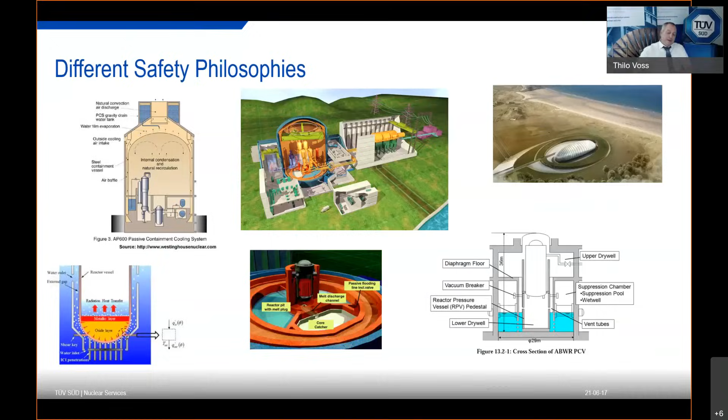Last but not least, we have PWRs, BWRs, or in the new world even AMRs, SMRs, and other technologies that have definitely different approaches to equipment qualification. And that makes all these things look a little bit complicated at first instance.

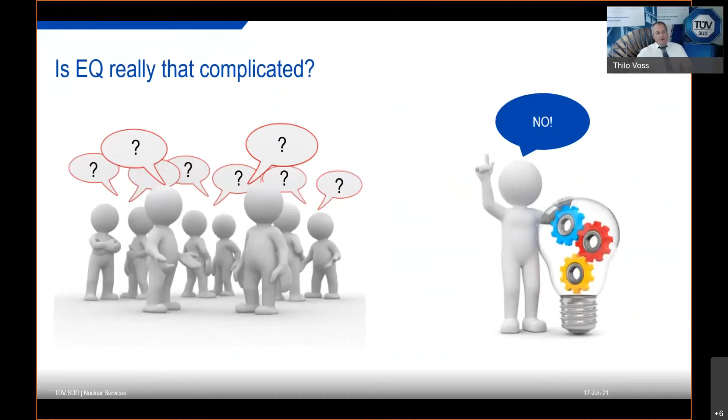But is it really that complicated? I would say no. In fact, you need to come back to what is basically the common goal of equipment qualification and start from that. And if you do that, you'll find a golden line for nearly every common EQ process in the world.

To help a little bit to enlighten that and to demystify nuclear equipment qualification, I would like to start again with what Simon said. The basis of all of that is, of course, equipment qualification shall help demonstrate that a nuclear power plant is safe as it is started and, of course, over time.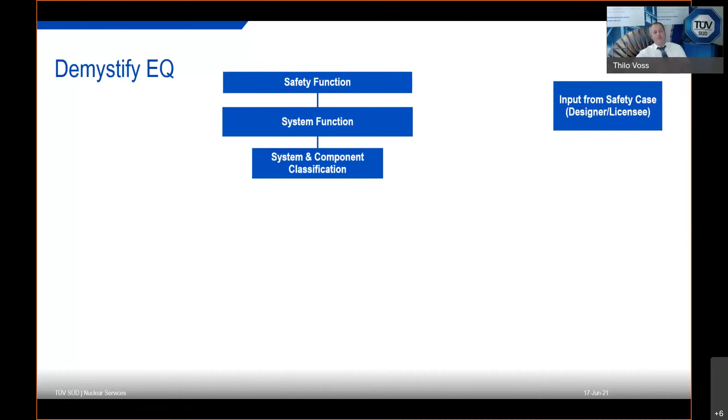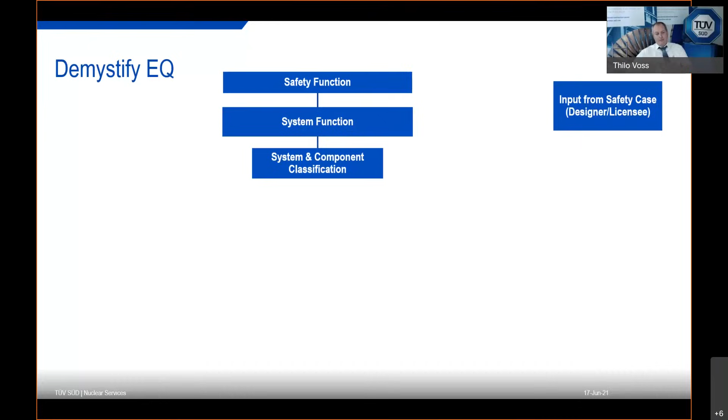So from that safety function, basically, we have systems to fulfill these safety functions, and these systems have system functions. This is basically the design intent that you need to take into account moving from one system, or from one new build project, to another. Below that, all these systems have subsystems, or are built out of components that are classified according to their safety intent. And this is the input that we were talking about before, that needs to come from the designer and from the safety case, basically.

But below that, you usually have rules and regulations in the country that can be applied. If you have a system like the system in UK from ONR, you can say, hey, I can use whatever I like to, I just need to make sure that I can argue in the right way. That's of course a very good thing.

On the other hand, we know that in other cultures it is easier to say, hey, I have something where I can do work by the book and just tick boxes. Nevertheless, you need to make sure you are aware of the set of rules and regulations you have to take into account. And from that, and from the input of what conditions your equipment shall work under, it's up to the licensee and the manufacturer, as a duo, to draw up the equipment strategy and draft that, then make sure the regulator is comfortable with what will come out of it.

And we had already questions regarding UKCA marking, for example, on the conventional side. I think it's very important to have that in mind right from the beginning, because I've seen projects that missed that and were struggling a lot in the end. You need to cover both sides. Luckily, normally the conventional regulation is covered by the requirements on the nuclear side. We had that already with safety margins and stuff. Normally the regulations on the nuclear side shall cover that if you have classified equipment, at least.

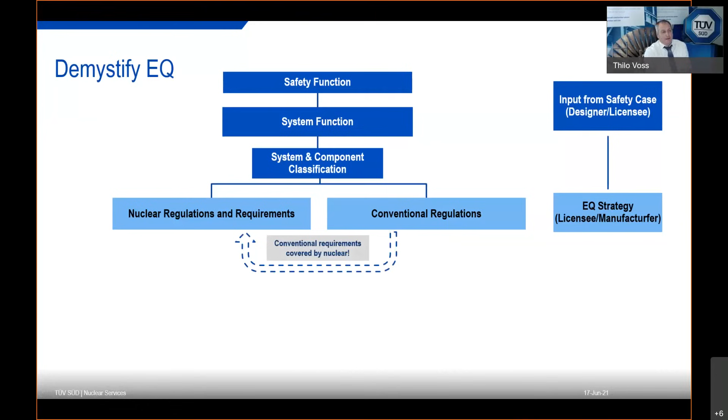And last but not least, what is necessary is the technical verification of the relevant codes and standards and requirements, and that your equipment fulfills that. That will be done with testing, analysis, taking operational experience into account - not only the transferability of development in technology, but also whether the equipment had been working in a nuclear power plant elsewhere for years. What is the experience there of the aging, for example? These are all things that will help you qualify your nuclear equipment in the end.

And last but not least, normally you will need a kind of certificate issued by a third party or anybody involved in the project independently, like a conformity assessment party or a NoBo, to make sure that your equipment is fit for purpose in the end.

So we had that already. Let me come back to one thing that was asked, which I'd like to touch on now: the classification of systems and how you can save money. Basically, equipment qualification costs money in the first instance, but it can also help save money. The role equipment qualification can play there, I'd like to show with my next slides. And this is definitely the graded approach to safety that was also addressed by Simon.

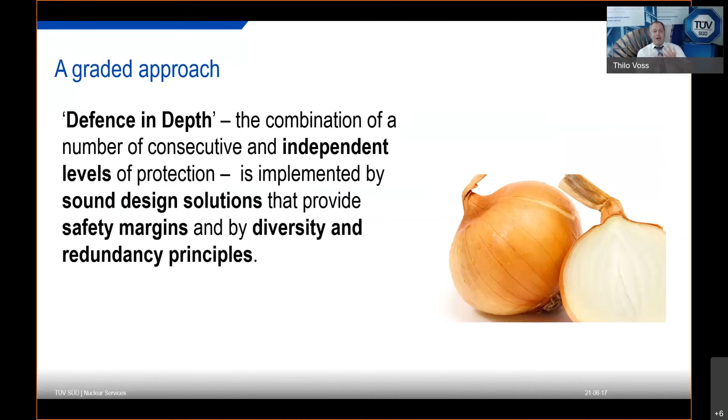Nevertheless, it's more, because defense in depth also means you have to implement diversity and redundancy principles. It's not like having a car with one brake system, it's like having a car with four independent brake systems that all use different physical ways to stop the car in the end. And that means not every equipment needs to be qualified to the highest level.

You have certain things coming from the safety functions and the system functions. Taking the defense-in-depth approach for safety into account leads to a qualification and classification system of quality grades of your nuclear equipment. This allows you to produce and manufacture equipment that is not of the highest quality, but is fit for the purpose it's foreseen for. It needs to play its role in the nuclear game in the end. I guess that's perfectly reflected in the ALARP principles in the UK as well.

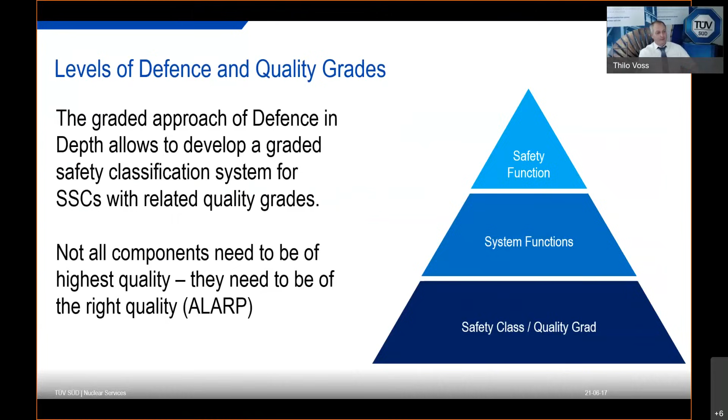Last but not least, this shows how important it is to have the right equipment qualification process and strategy in place, because that helps you demonstrate your equipment is fit for the purposes you foresee. So you won't all produce components for safety class 1, the highest level that has to fulfill the highest safety functions.

You need to qualify your equipment appropriately, and we had that question already: do we have equipment that needs to be qualified for seismic if it's not classified? Graham's answer was perfect. The answer is yes - if it can hurt or damage anything that is classified, it needs to be resistant to seismic. But in fact the component itself may fail; it just doesn't need to harm anything else. That's the important answer.

You always need to make sure what your equipment is foreseen for. What shall it do? What is the safety function it has to fulfill? From that you need to draw the right principle, the right specification and the right setup for your equipment qualification. That will help you in the end to balance cost versus quality.

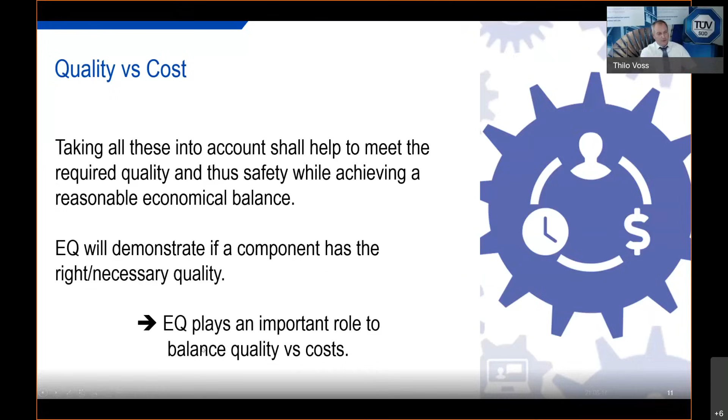I'd like to say one more thing, touched on already by Cord, and here again in my summary: it's very important to get all stakeholders on a round table very early in the race. Why is that so? Let's take the cost example. One thing nuclear new builds nowadays really suffer from is a lot of rework. If you have to do things 3 times, 4 times, 5 times...

Believe me, I've seen revisions of specifications for nuclear qualification that were definitely not planned in the beginning, causing cost and time overruns. If you have the stakeholders on board right from the beginning, that helps you avoid costs in the end. There's many things you can easily see - if you find errors late in the race, they normally cause more problems and more costs, versus finding errors early and implementing countermeasures.

The other thing is there is really not one EQ strategy that fits all nuclear power plants. That's true, so you need to transfer the knowledge - this is also very important, Cord. If you've done that once, you're very familiar with your equipment and know how the processes run, and that can be transferred. I would like to see EQ as a kind of excellence model. You can really gain excellence, and with that excellence you should be able to transfer your equipment from one nuclear power plant project to the other.

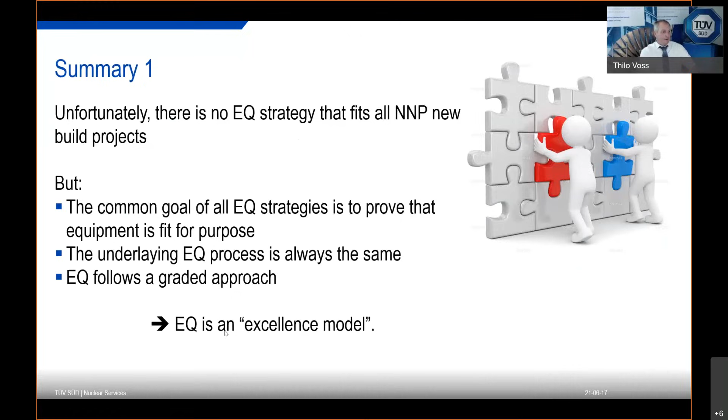But in fact, my advice would be: try a competent partner, experienced in that field, especially in the area where you intend to deliver your nuclear components. Involve the stakeholders early. Don't forget the third parties, please. I'm from a third party, so I can tell you this can really cause headaches late in the race if you haven't involved these guys early.

And there's help out there. It's a marathon, as was already said, but I guess there are people that can help you win that marathon. Many thanks.

Brilliant. Thanks, Thilo. That was excellent and really good advice there. And it looks like, you know, you don't have to worry too much about that process if you get a little bit of help. So thanks for that. And we have some questions, of course we do, for you too.

So the first one: if a component is already qualified for a specific project, is this qualification transferable to other projects with lower requirements, perhaps regarding seismic requirements? Yeah, that's perfect. Yeah, indeed.

I guess the important point here is the lower one. As Graham said, these questions are complicated. In general, yes, but if you look at seismic requirements, seismic is something where you have loads over a frequency band. If all loads are covered over this frequency band, normally it's a conservative way to qualify your equipment. And of course, if that is done correctly, you can transfer that.